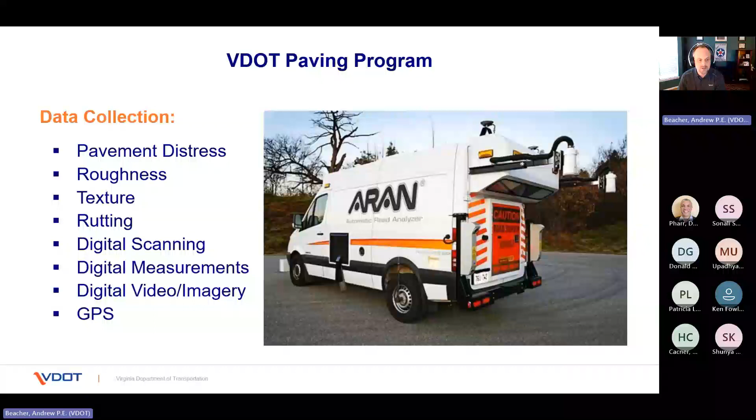So how often do we do this? It's done on an annual basis for interstate, primary, and high volume secondary roads. High volume means average annual daily traffic above 3,500 vehicles per day. For low volume secondary roads, which have a volume less than 3,500 vehicles per day, that is done about once every 5 years, mainly because there are so many low volume secondary roads, and it takes significant time to review all of them.

But essentially we have 100% of all of the low volume secondary roads reviewed within 5 years.

Getting into the pavement ratings themselves, these are based on what is called the Critical Condition Index, or CCI. Any pavement with a rating below 60 on the CCI scale is considered poor or very poor. If it's above 60, it's anywhere from fair to excellent. In all of our roads, we strive to achieve a CCI of 60 or greater - that is our target for each individual roadway's rating.

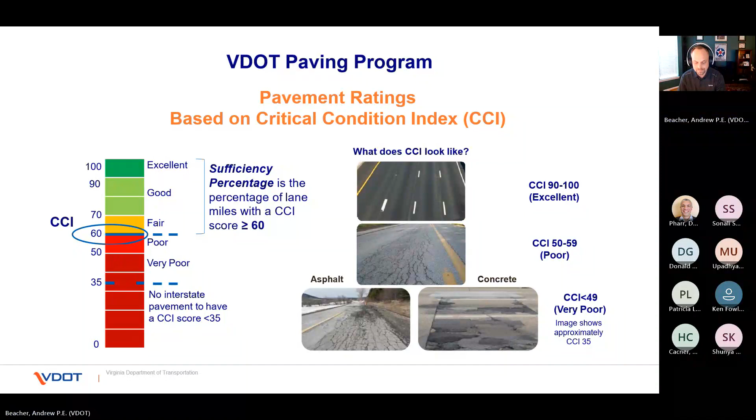As an agency, VDOT does have targets for each of its districts with respect to pavement sufficiency, depending on the classification of the roadway. For an interstate, the target is about 82% of all roadways having a CCI above 60. High volume primary roads, the target is also 82%. For low volume primaries, the target is 75%. High volume secondaries is again 82, and then low volume secondaries is 60%.

Here in this slide you can see a snapshot of the pavement conditions. This is from 2023, and on the side there's a legend. You can see blue is excellent, green is good, yellow is fair, magenta is poor, red is very poor, and gray is not rated. From this you get an idea of just how many roads we have to evaluate and maintain, but also that we still have plenty of work ahead of us to keep ahead of the curve as far as maintaining those roads.

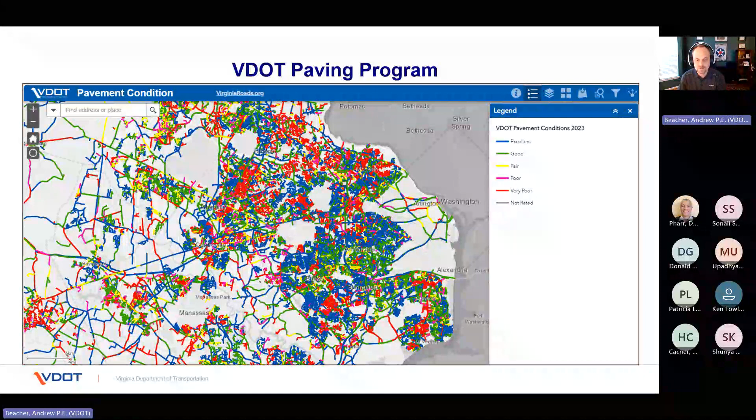Now, when it comes to the different types of pavement treatments, there are different avenues we can take depending on the condition of the roadway. In some cases, our staff may determine that a preventative treatment, such as a slurry seal or latex treatment, may be appropriate if the roadway is not quite in need of full repaving but is showing some wear and tear. We can use that type of treatment.

Then we also have the common repaving operations using plant mix, corrective or restorative maintenance types of treatments. The difference between those two: with corrective, we'll mill about 2 inches and then overlay back that same 2 inches of surface mix asphalt. With restorative, we go a little deeper, up to 4 inches, overlaying the surface and intermediate mix asphalts. Finally, if we have a roadway that's in pretty rough shape, there may be a need to do something more significant - in that case we might do a full depth reclamation, where we actually excavate the existing pavement, stabilize it, and then add back the intermediate and surface mix asphalt.

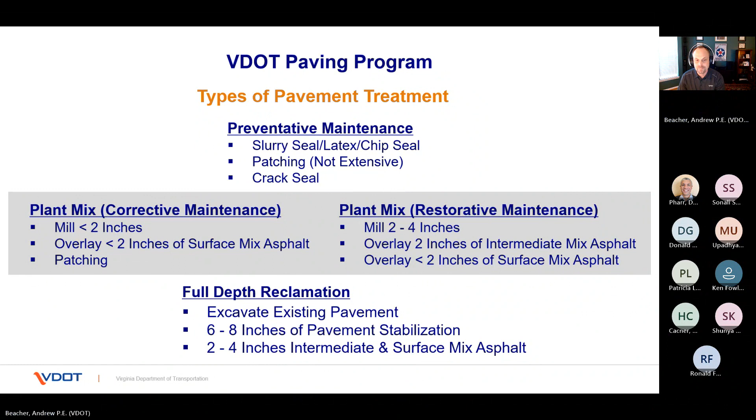I will say with that last one, that is pretty rare. We, of course, try to keep our roadways in good enough condition that we don't get to that point. But there are some instances where you might get surprised by the condition of the pavement, and that's when we would employ that technique.

Now, with that said, we will continue to target those areas of need, focusing a lot on the secondary roads, but also tending to the needs of the primary and interstate roadways as well.

Okay, on this next slide, you can see a snapshot of the 2024 paving status map. This is the actual map that shows you what roadways we're targeting for this upcoming paving season and what stage those roadways are in. If the work is scheduled and has not yet started, that's in red. If it's in progress, it's in green. And if it's completed, and there are a couple that are already completed, they may have been carryover from last year, you'll see those in blue.

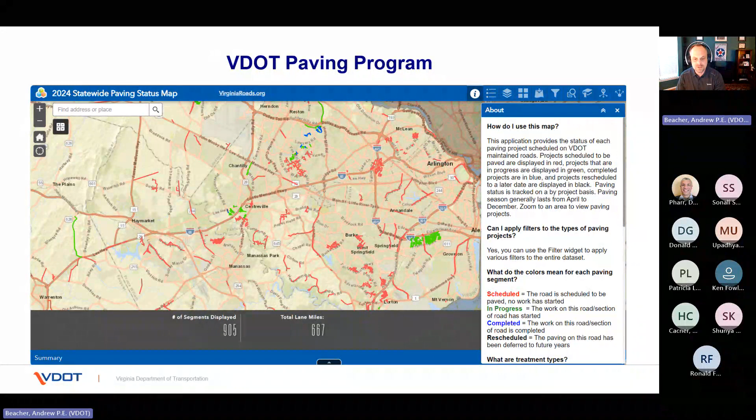I am going to do a live demonstration of this towards the end of my presentation, but right now I just wanted to share with you a snapshot of what that looks like.

Okay, so when it comes to pavement marking and striping, the way that our contracts are set up, we typically replace in kind the existing striping. So what you see now will be the same for the most part afterwards. Occasionally, though, we are able to make some minor adjustments during repaving. But the more elaborate type changes that you might see for something like bike lanes...

...new crosswalks or road diets, if you're familiar with those, require significant prior planning and coordination between VDOT and Fairfax County Department of Transportation.

So if one of these types of significant changes is requested on a road that is scheduled for repaving, what we'll do is in most cases defer that repaving work to a future year so that we give ourselves time to coordinate and plan accordingly and get the proper analyses done so that in the next paving cycle we're able to go ahead and implement that revised striping.

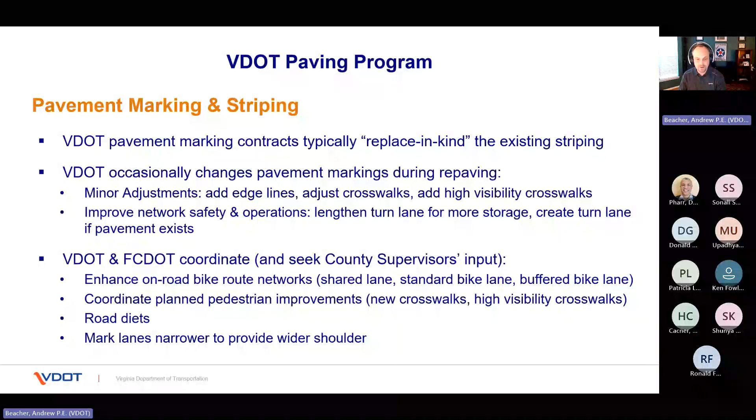And I think Hannah will discuss some of the more specifics related to initiatives that might be occurring in this particular district of the county.

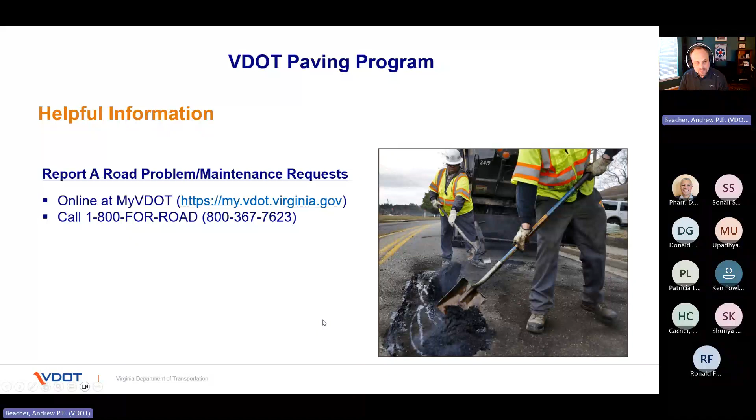On my concluding slide here, I just wanted to share how the public can reach out to VDOT for more routine requests related to whether it's repaving or just a basic maintenance type issue. So I've got here online the web address for MyVDOT, my.vdot.virginia.gov. You can go to that or call 1-800-FOR-ROAD, that's 1-800-367-7623. And with that, that concludes the formal part of my presentation.

Before I turn the floor over to Hannah, I'm just going to go ahead and briefly walk you through the 2024 paving status map, as I had mentioned. So if you bear with me.

Oh, and by the way, here is MyVDOT. If you wanted to report an issue to us, you can see the different categories of things that you can report out to us, and that'll get sent to our customer service and routed to the right folks.

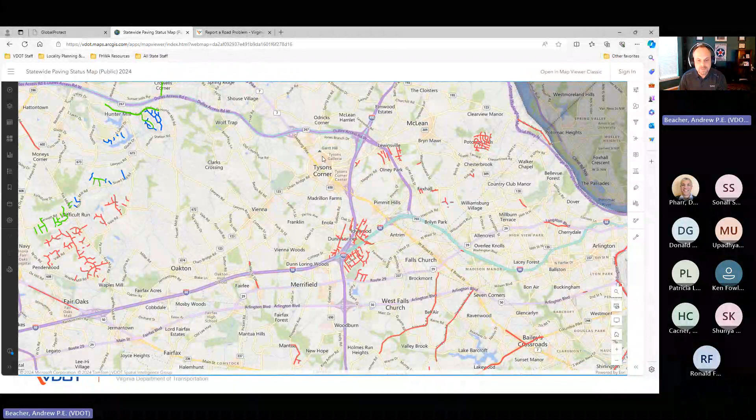But the status map you can see here, this is what I've pulled up off of virginiaroads.org, and I've kind of focused in on the Providence district area of the county. You can see Tysons Corner here. We've got the Beltway as well as I-66, and you can see some of the communities and neighborhoods that are scheduled for repaving. Again, it's an interactive GIS map, so I can zoom in and look closely to see what specific roads are being targeted.

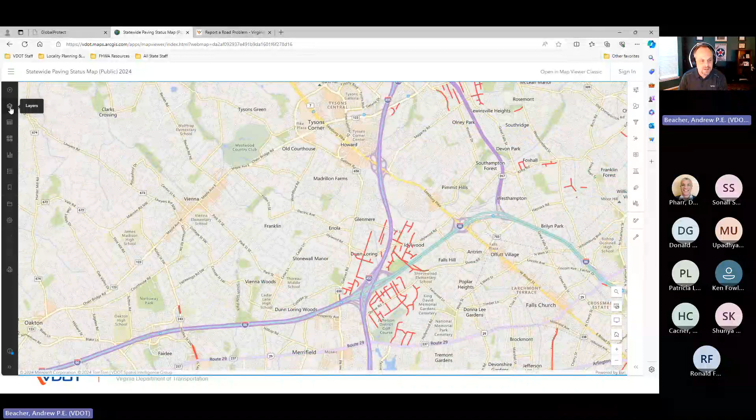You can also go over to the side here, and there's different layers and base maps. If it would be helpful to adjust that, you can do that just by clicking on these different identified base maps. All right, so that's basically what I wanted to share with you all tonight.

So we'll just start off with a little bit of background on the repaving and restriping program in Fairfax County. Each year we collaborate with VDOT to provide new striping improvements on our roadways, typically in the form of crosswalks and bike lanes. And we start off that process by reviewing VDOT's draft repaving list and identify roadways within that list that VDOT plans to repave that could also be good candidates for new crosswalks and or bike lanes.

We are limited to roadway segments that VDOT is already repaving, so any proposed crosswalks or bike lanes must fall within the area that VDOT is already planning to repave. Additionally, the scope of this project on FCDOT's end really does not extend beyond adding striping to the roadway, so improvements like protected bike lanes are not something that we're able to do through this project.

A major reason that we do this is to repurpose some underutilized road space. Many of our roads here in Fairfax County were built with much wider travel lanes than are really necessary, or with too many travel lanes, which can lead to some safety issues like speeding or inattentive driving. And the repaving program allows us to bring down the lane sizes to a more appropriate size by adding improvements like bike lanes, which make the road appear more narrow and improve safety for all users at relatively little cost.

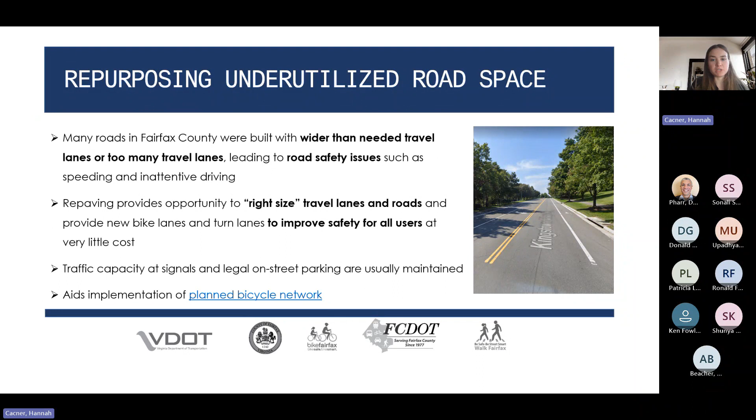Typically, the traffic capacity at signals is maintained, and we'll try to maintain legal on-street parking where space allows. Adding bike lanes through repaving also aids in implementation of our planned bicycle network.

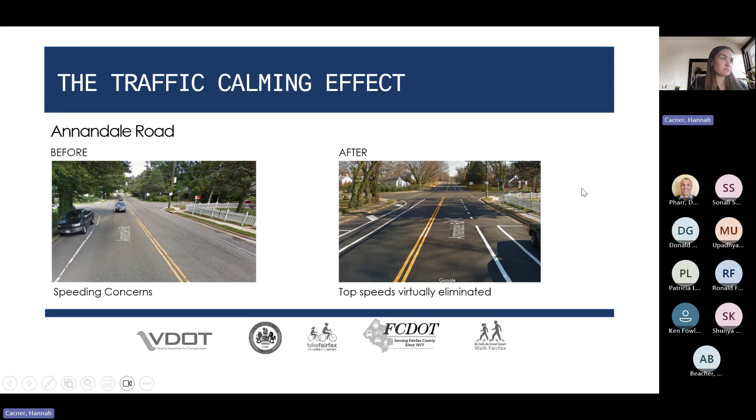Although this program only allows us to stripe bike lanes, adding that buffer gives us space to have the option in the future to protect that bike lane by adding physical barriers through other projects. Again, that's not done through this project, but it gives us the option of doing that in the future.

These are just a few benefits of adding bicycle infrastructure. As you can see, there are benefits to all roadway users here, not just cyclists. Again, they provide a nice traffic calming effect by making the roadway appear much narrower to drivers.

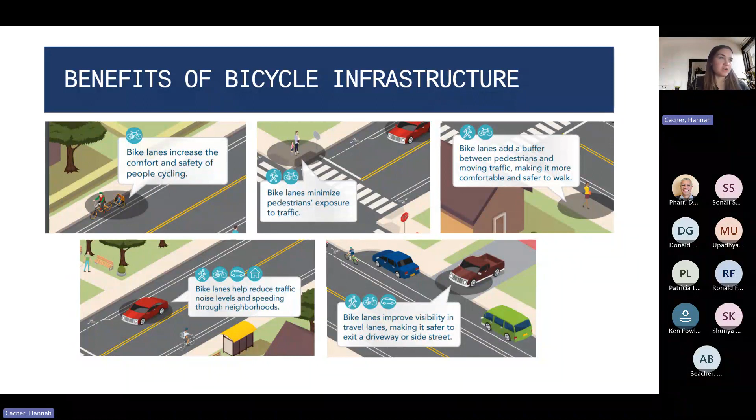Moving on to our proposed striping modifications in Providence District. First up, we have a proposed bike lane project on Anderson Road between Birdwood Avenue and Magarity Road.

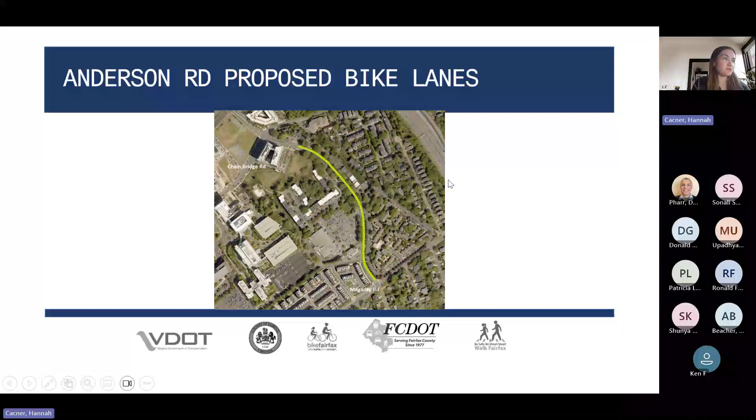Currently, this segment of Anderson Road has two very wide vehicle lanes with some on-street parking on both sides and then sidewalks on both sides. There's also various residential and commercial development of different densities in this area.

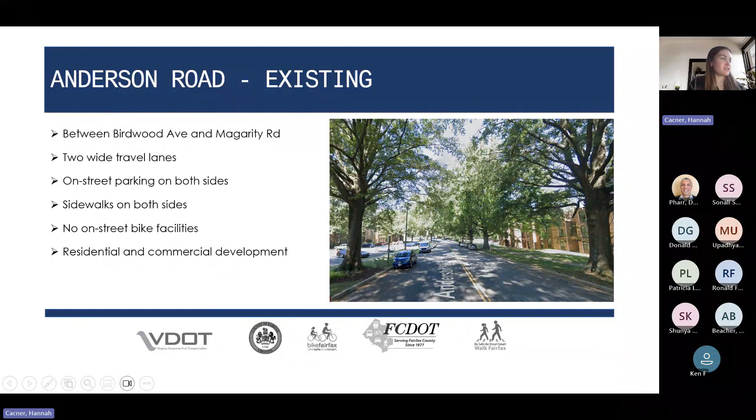What we're proposing is adding buffered bike lanes to the segment by repurposing either one or two parking lanes, per the countywide master bicycle plan. Whether we repurpose one or two parking lanes will depend largely on community feedback.

We did perform a parking utilization study, which will be linked in our feedback survey, that found there was really only one stretch of heavily used parking on the northern end of the street, shown in red here. On-street parking was generally underused between Colshire Drive and Magarity Road.

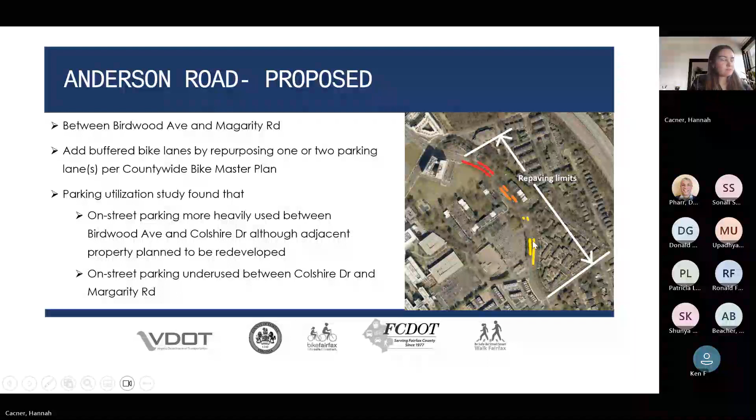So the options everyone will be able to vote on through our survey, which will be linked at the end of this presentation and is also available on our repaving website, are to repave the road as is, leaving everything the same, without adding any bike lanes.

There's also the option of adding a bike lane only in the uphill direction, which would retain the parking bay on the northbound side of the road.

Or we can add buffered bike lanes along both sides of this road, which would repurpose all of the street parking along this segment. However, some of that parking at the northern end of the roadway could be brought back with the eventual redevelopment of the Commons of McLean.

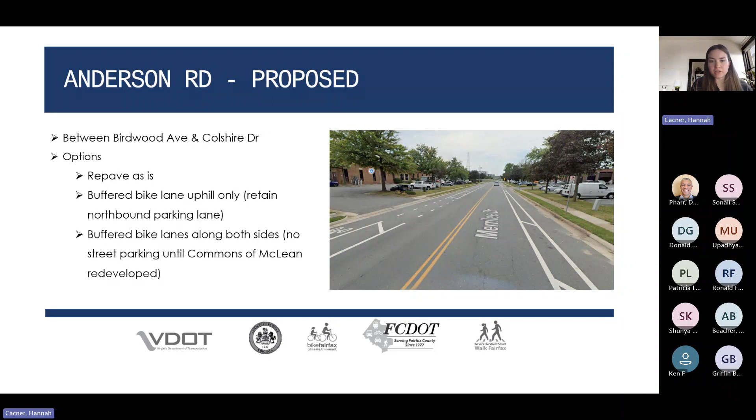Unrelated to the repaving program, we're also proposing to add a Capital Bikeshare station on Anderson Road near Dartford Drive, at the location pictured here in red. This station would be adjacent to the condos, townhouses, and shopping center.

Again, this is not something being proposed through repaving, but we still wanted to take the opportunity to gauge the community's opinion on adding this bike share station in our survey.

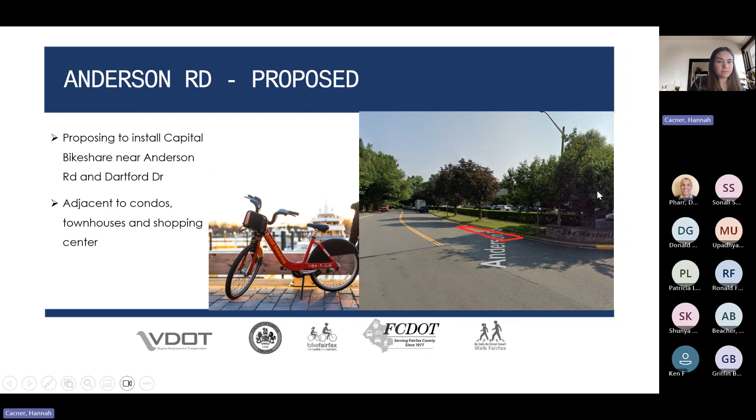If you have paving-related comments, including drainage issues, missing signage, signal repair, walkway repair, and sight distance issues related to vegetation overgrowth, those should be submitted to VDOT through the My VDOT portal, which is linked here.